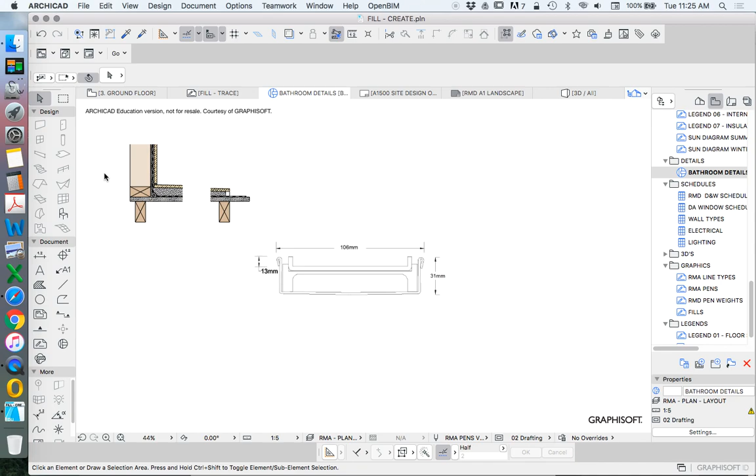The next detail that we need to have a look at is in relationship to the wall-to-floor junction, which determined the minimum depth of the tile or the screed: what is the drain that we're using. So here is a StormTech drain. This StormTech drain is based on having a tile thickness of 12 millimeters, so 13 mil tray for a tile insert drain. So we need to resize this one.

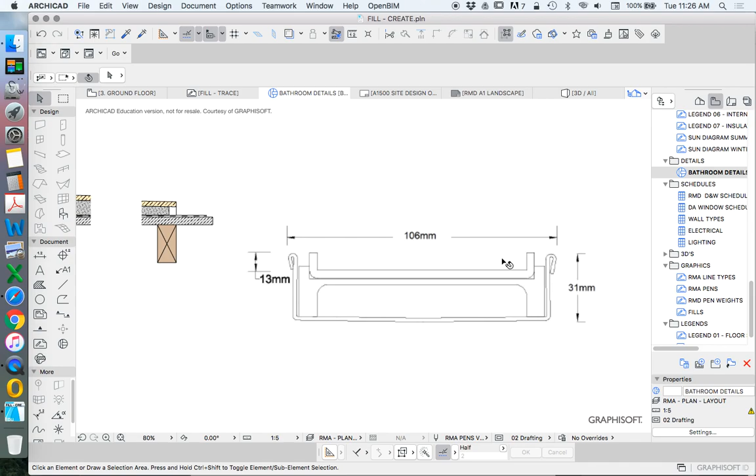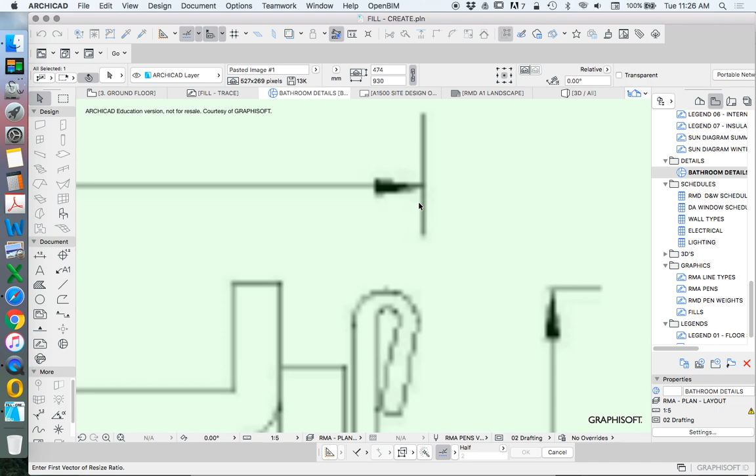This one is just an image, so we see it's pixelated, so we won't be able to explode it, but we can still trace it. So we're going to stretch this. We're going to use resize: edit, reshape, resize, and we're going to resize this based on the longest dimension, 106. R106. So we can trace that.

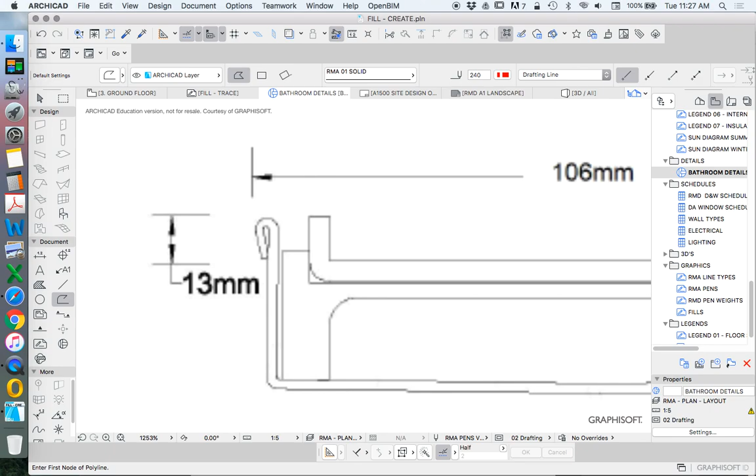Sometimes when I'm tracing, I'll just trace directly here. In this case, not put it on another one. Just use red, my red pen. And the advantage of using the red pen is it's just a little bit easier to see where I'm tracing. So often I will start with, I could use a fill straight away, or I could use a polyline. And then once I've created the polyline, I can then magic wand in the shape.

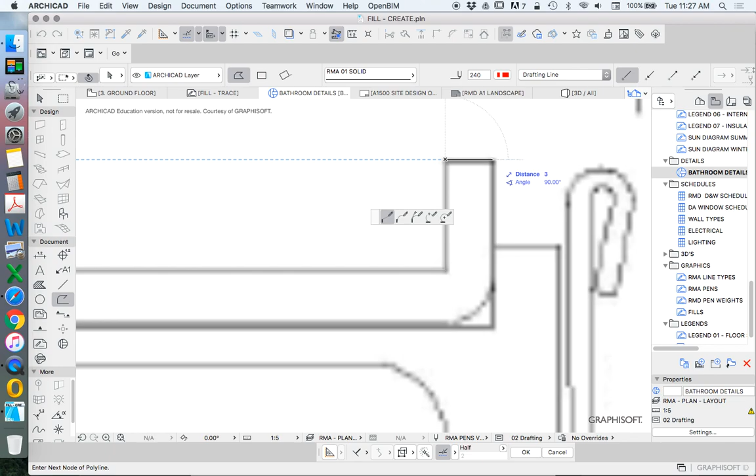Definitely a question of how accurate do we need to be. If we're not given a millimeter dimension, well, we could just guess, can't we? Turn off true line weight, so that's a bit easier to see. And then we'll just add in the radius. Again, it doesn't have to be perfect, it's just representation.

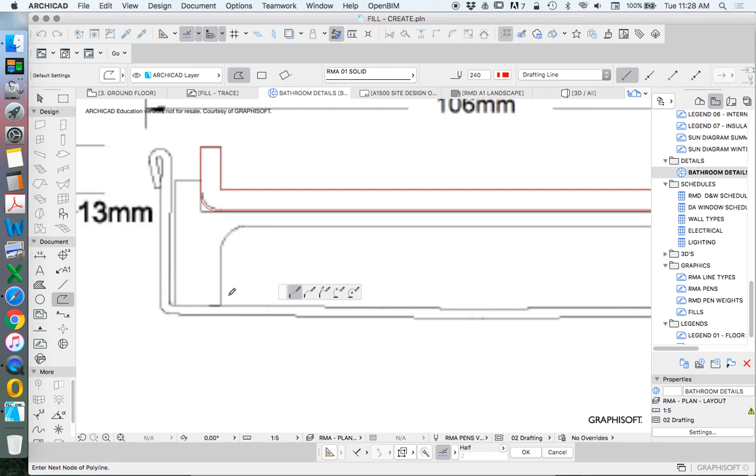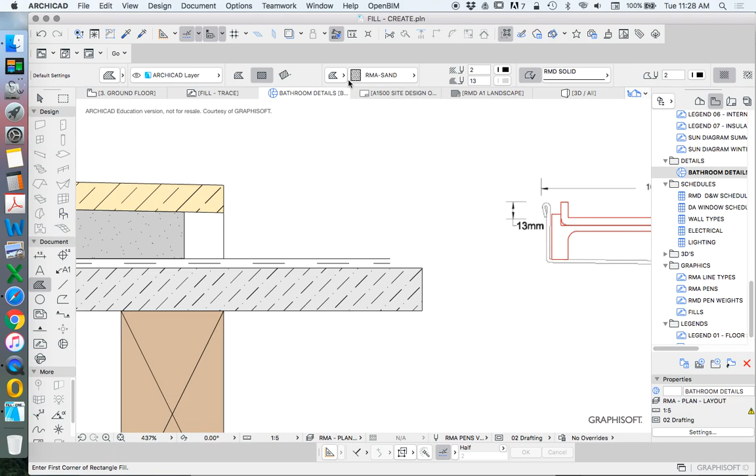Once we've finished that, we'll then use the fill tool to add in the finish. And for something like this, because it's stainless steel, generally speaking, I would just make it a solid fill. So I'll just use solid fill, and I'll normally make it just solid black. Again, I don't need so much detail. Just missing that last one, so I'll add that one in as well.

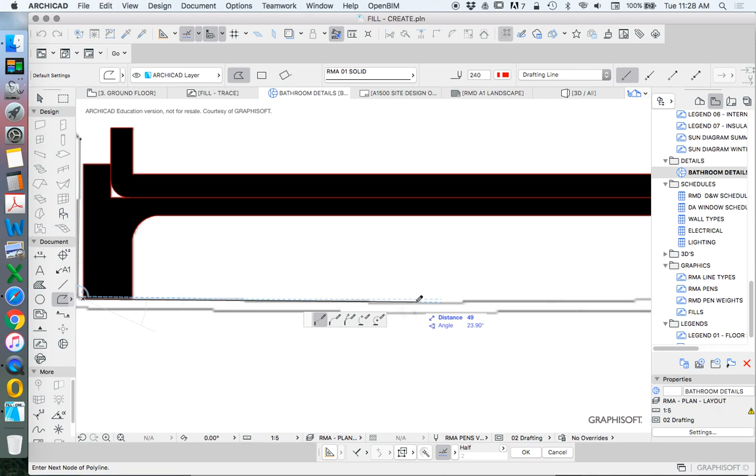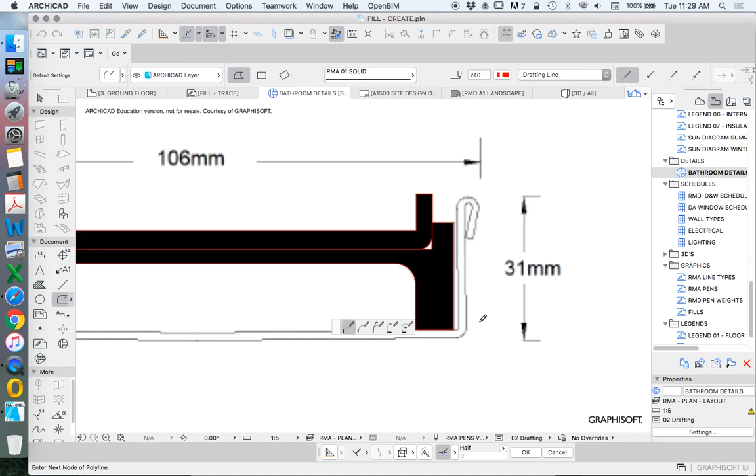There's a bit of a camber on this one, like I said, a bit of a slope, so we just want to reflect that slope. We could be tricky and just do half. I'm almost there, so I may as well keep drawing. Finish this off.

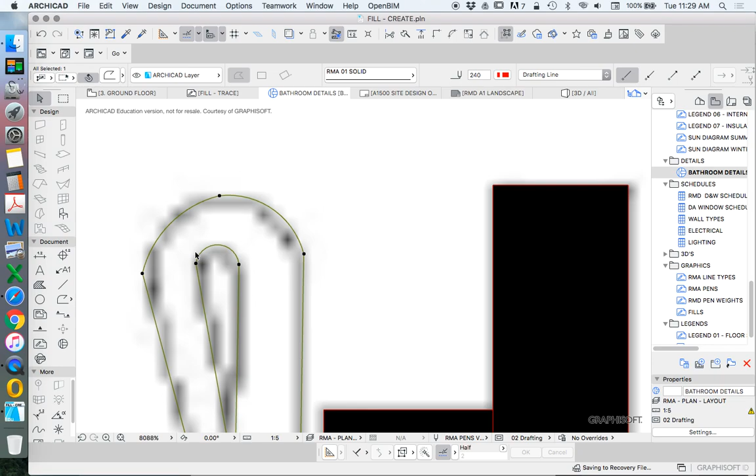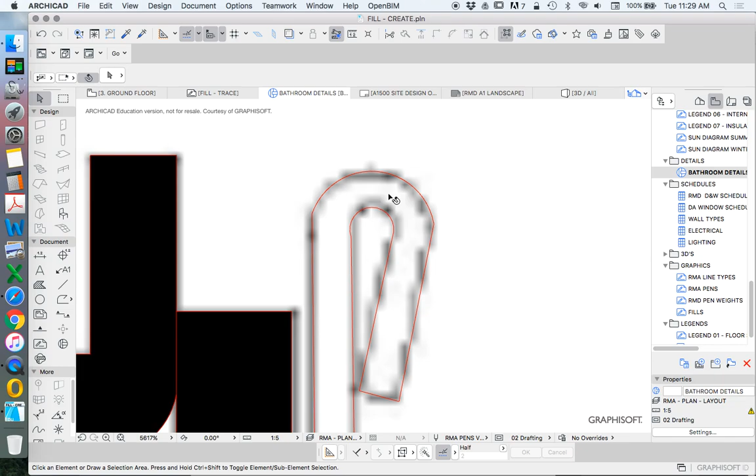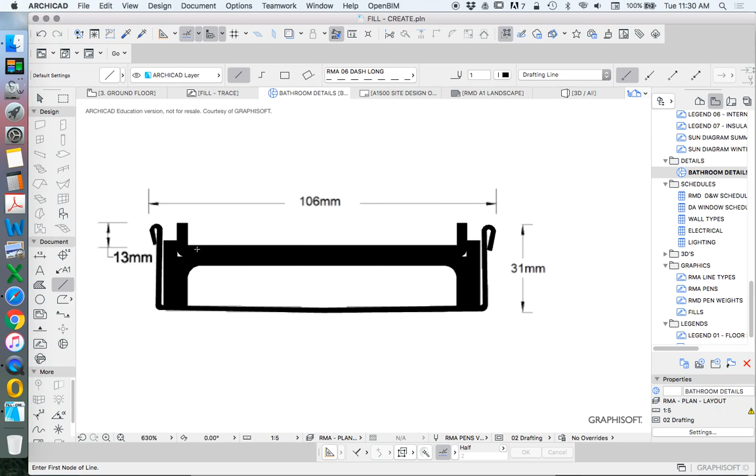Now sometimes we can download these as PDFs or DWGs and avoid that. In this case I just grabbed an image just to make it fast. And again, the point of this is that we can insert that into it. If this isn't giving us the right number, we know there's something wrong going on. So that says 106, but we see that that's completely wrong. That's not 13 at all. So how do we fix that? We're going to have to allow for more depth.

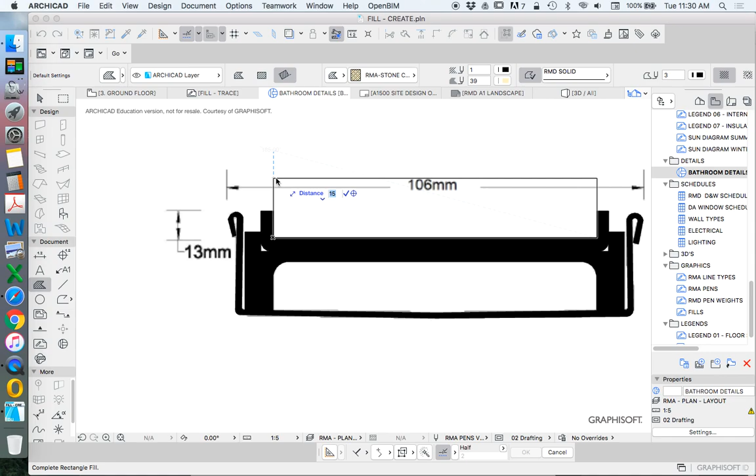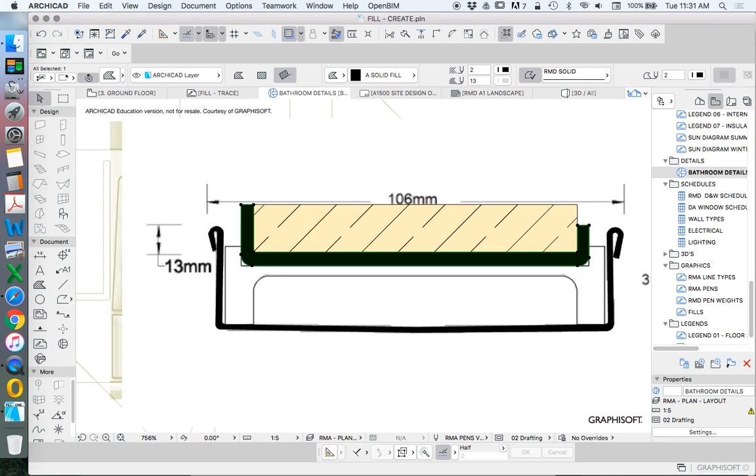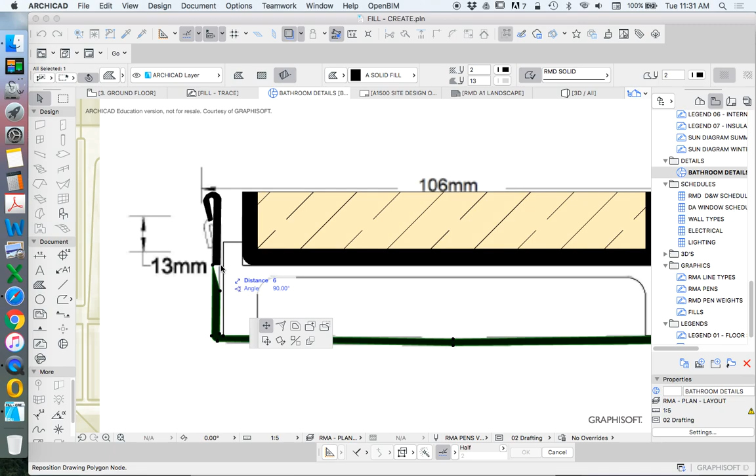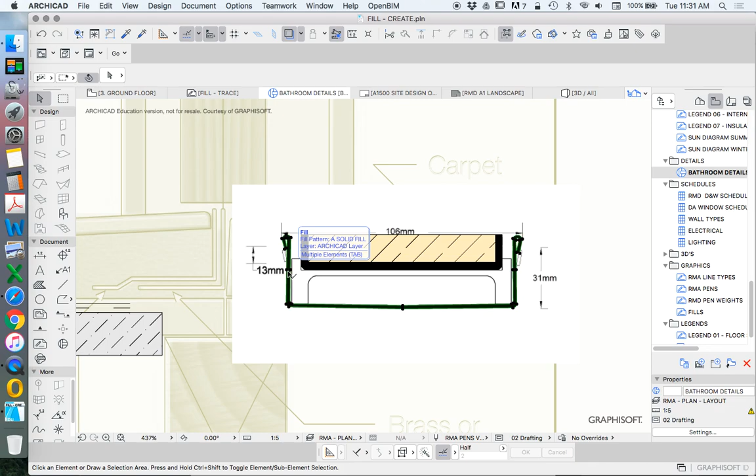And we'll increase the height of this by cutting it, make it into two parts. We'll move that up, and then we'll stretch that. We could have used the stretch tool, but it's fine. Now if I want to join them all back together, which makes sense, I'll do that. Plus, plus, and then get rid of the extra bits. Great. So that's our drain.

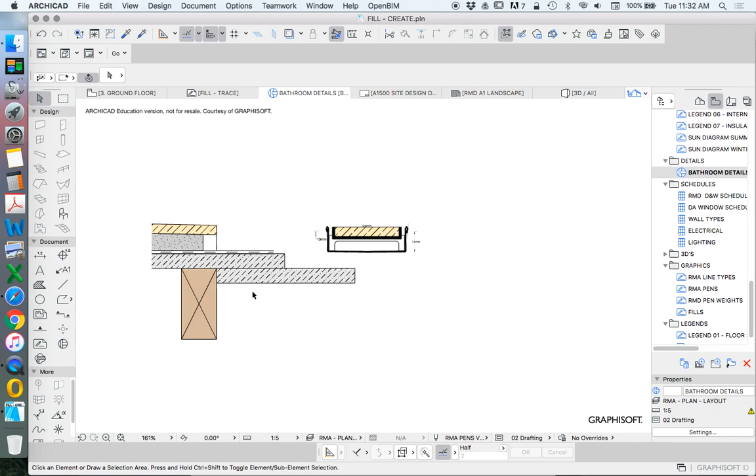Now what do we need to do? Can we sit this directly on the floor, or do we need to set it down? Ideally we set it down. Does this happen very much? Not as much as it should. So what does that mean? What we should be doing is creating a set down. And so let's get rid of this one now. So our drain can sit in here, which allows the waterproofing to go all the way underneath.

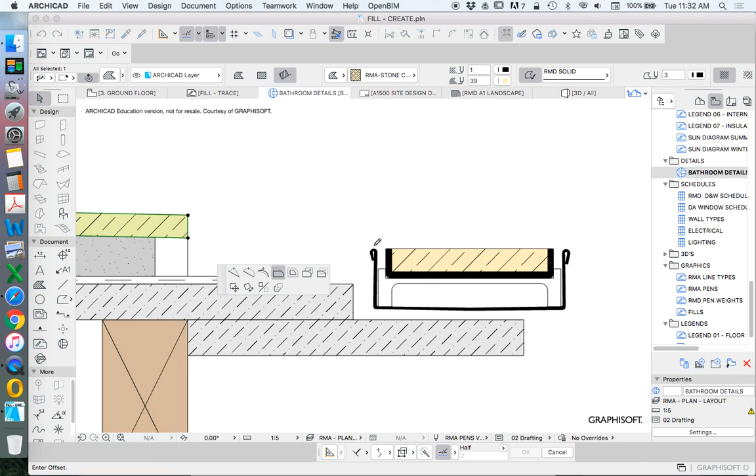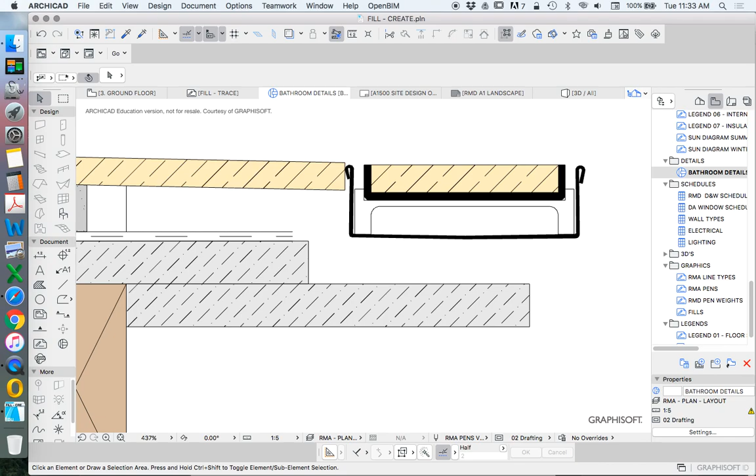And of course this lines up at some point, so that the height of our drain needs to sit just below or in line with the height of the floor. So then we'll just refer to the technical literature to find out how big that is, and of course we might actually have slight spaces on this to be able to create a silicone seal to that as well.